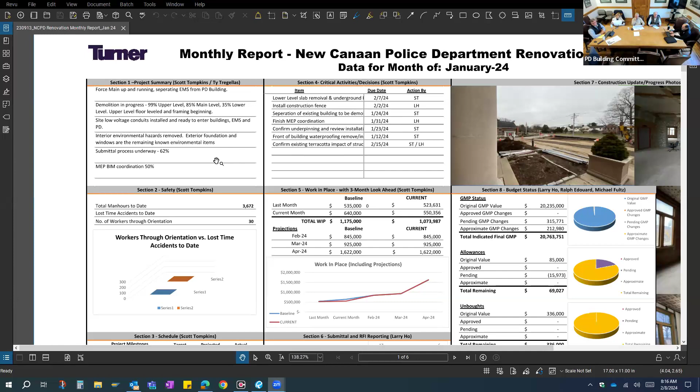Larry, you wanna pull up the monthly report? Did you send it out, Joe? People weren't really able to read it probably from there. Yeah, it was saying Gene sent it out. Does anybody see the screen? Yes, I actually have it on my computer at home here.

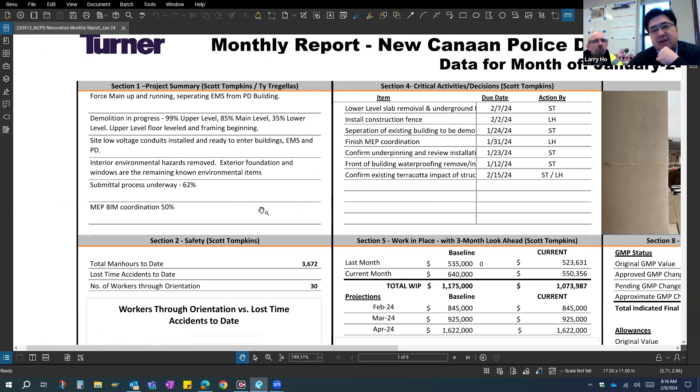So this is similar to last month in December, so we have a few updates. Basically the project summary. Do you want me to go through each section, or do you want to highlight each section? I don't know how the building committee wants to go through this, but I'll just give everybody some highlights.

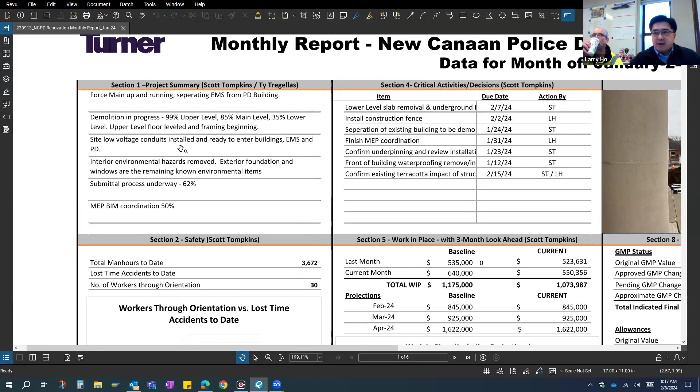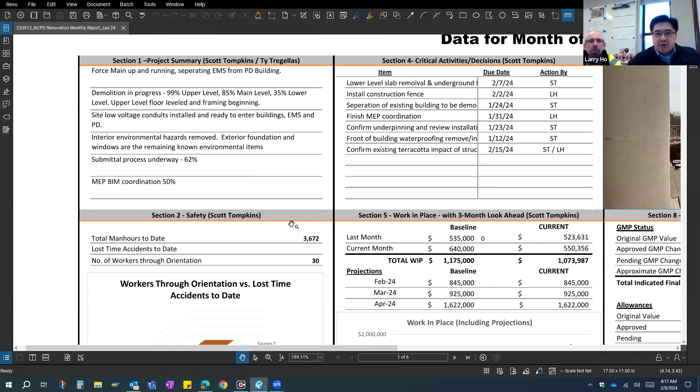Some project summary, current summary. The force main right now is completed, and we have the construction fence separating ourselves from EMS as well as the neighborhood area. Our current demolition: upper level is 99%, main level is 85%, and 35% at lower level. We're also starting to demo the existing floor slab that we are going to lower. Right now we're expecting to finish the rear building demolition, and then we can start clearing the dirt for lowering the slab.

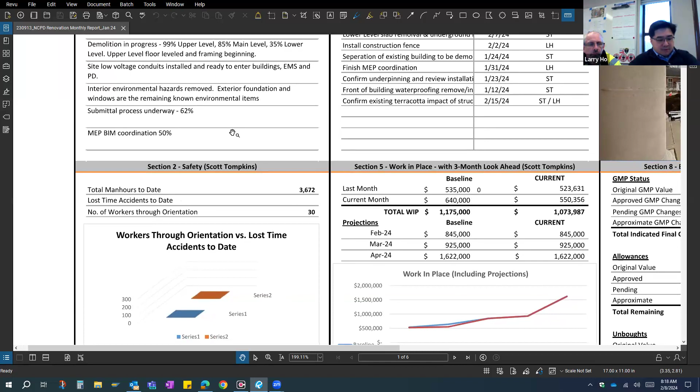Highlighting the submittal status, we're about two-thirds of the way through, not including closeout items. So we're in pretty good shape at this point. Most of the major main items are either in review, approved, or released. Our MEP coordination is at 50%. We've gotten through underground and upper level, so we're down to main level and lower level at this point.

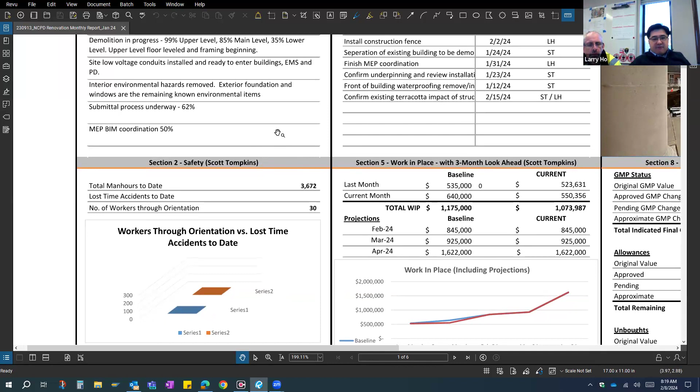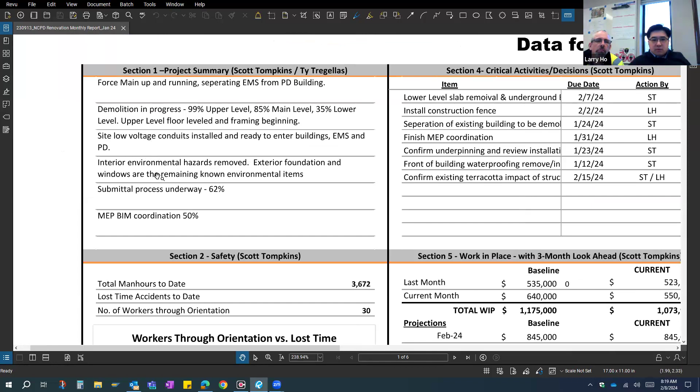I have a question on the third item, the low voltage conduits. Can you just explain what that is?

Those are the low voltage conduits that will feed the new fiber optic cables from the power pole at the street into both the PD and the EMS building. Currently they come into one side of the building, and we're working to get them to the other side. We performed underground conduit install at the EMS drive, and now we need to get them across the site and tie them into the EMS, so we can prepare to receive the new fiber optic cables to the new IDF closet on the main level, as well as refeed and support the EMS building.

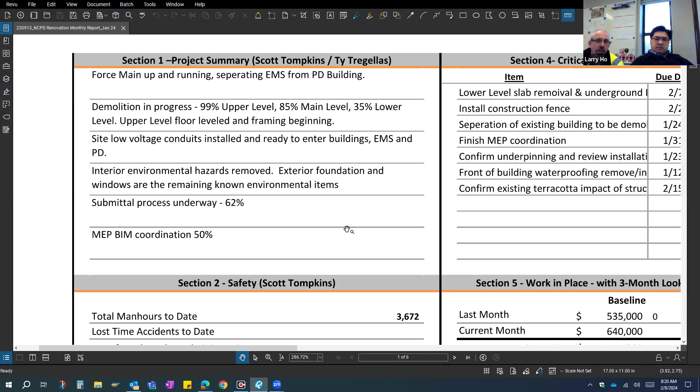Out of curiosity, how big are those conduits for the fiber optics? We've got four 4-inch conduits, three 3-inch conduits, and one 2.5-inch conduit. So they're substantial — 4 inches is a substantial size. All right, so we've got lots of room for future.

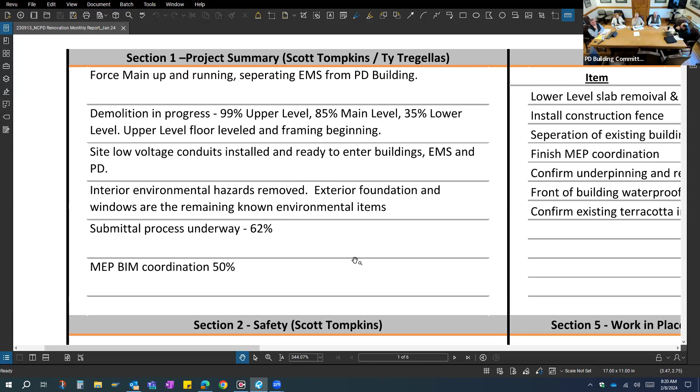The only thing we know for sure about the conduits is that when they go to plant a tree, they'll dig them up and cut them, sever them. That's the only thing we know for sure. Yeah, that's absolutely correct, but thanks for noticing. Hopefully not, knock on wood. All right, thank you. It's not direct buried cable, which is what we found too. That's what it was there. Yeah, correct. All right, good.

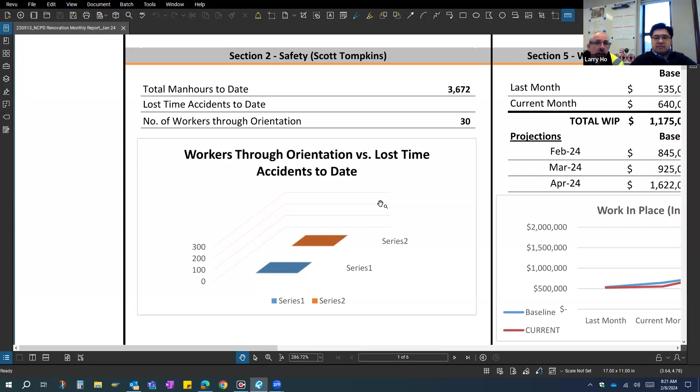All right, safety-wise, I'll go down the list. Larry and I will probably tag team this in different sections. Total man hours on site, we've got about 3,600 man hours so far. Number of workers we've put through orientation is 30, so we've had 30 men cycle through the project. We have zero lost time accidents, knock on wood. We've been doing pretty good out here with the safety team, so we're in pretty good shape there.

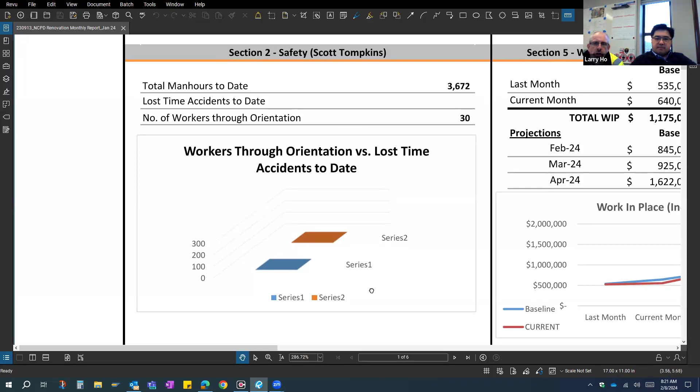Scrolling down to hit some of the major milestones. Obviously we're in the infancy of the project here, but certainly there are a couple we have hit. We've completed the EMS sanitary force main, which was a milestone to get EMS operating in their normal fashion as best we could, with their drive back up and running. We also started the upper level renovation, working through challenges with the rear building, the environmental brick concerns, and the jail cell. We were able to keep going upstairs, so we've started the upper level renovation.

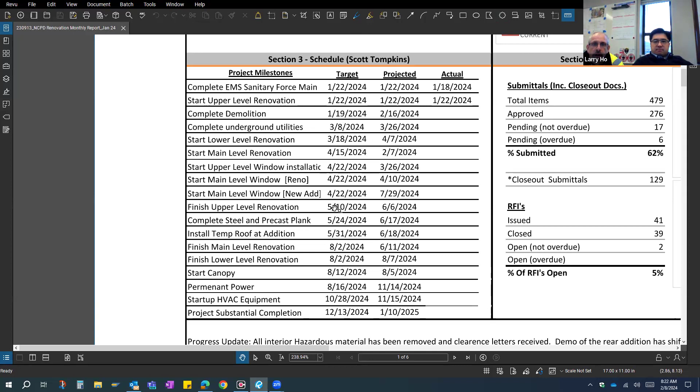As we go down, the rest will fall into place as we get to the rest of the milestones, but we're still in the infancy here. Certainly some of those milestones, our objective is to try to bring them up and advance them for completion. But we're going to keep moving on as the schedule dictates.

In summary, the third line, complete demolition, that's the demolition of the rear addition. The adjustment in that time frame is really a combination of the hold for the jail cell and the additional abatement, so it's just about a little under a month.

Why did the main level windows item jump by 3 months? Is that a typo? No — in our original schedule we didn't differentiate between the windows in the renovation and the addition, but the addition is obviously lagging behind. So we created an extra category, but in our original schedule we didn't differentiate; we instead just had a general windows start.

All right, look — everything's 3 weeks behind. So is there any effort, any plan, to get that 3 weeks back? We'll do whatever we can.

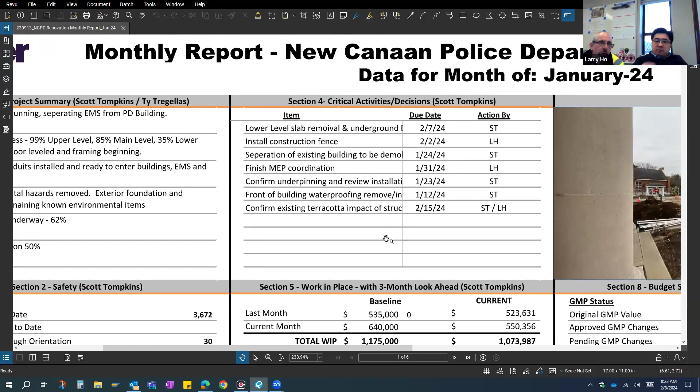When we get the locker room floors to the right levels, don't we have to do some demolition to lower it? Right — so what we're doing right now is we've chopped the floors out, removed the concrete slab. Once the building comes down at the rear, that allows us to extract or remove the dirt from inside the building. We can't do it now while we travel through the building demolition. So once the demolition is down, we double back inside the building, remove the earth to drop that slab 1 foot 10 inches, and then we can begin the interior work.

We've chopped the slab out to reveal all the dirt under the slab, the earth that the slab was poured on. We then investigated the location of the footings within the building, and we're in the process of doing that right now. We're working with our concrete vendor, who has secured a structural engineer to design an underpinning process where necessary, to underpin the footings appropriately to carry the load of the existing building. It's done in such a manner so as to never disrupt the structural integrity of the building while underpinning, which is basically supporting the footing that would otherwise be suspended if we were to drop the slab. So by dropping the slab, we expose the bottom of the footing. We then perform underpinning, which allows us to continue our efforts without disrupting the structural integrity of the building.

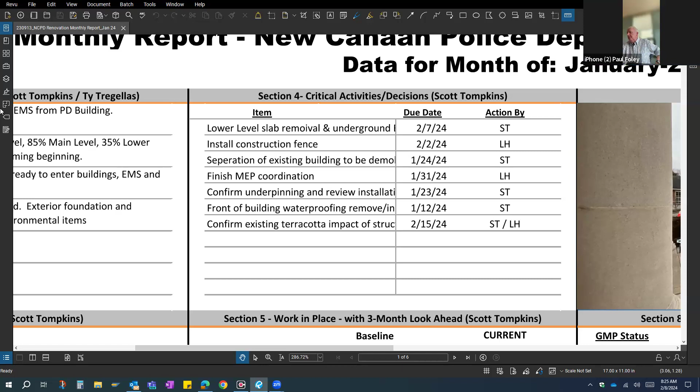The footings went down at least 12 inches and maybe more. Yeah, correct, the footings are down about 1 foot, 10, somewhere down about 2 foot in various locations. We need to drop the top of slab 1 foot 10, plus you've got some underlayment of stone for the bedding of the concrete, plus or minus 6 inches. So we're going down roughly 2 foot 4, 2 foot 5, and we're investigating that as we speak.

We had a site walkthrough with our vendors and our team, and we formulated a couple of questions for the design based on the existing conditions that we discovered.

If they're doing the right thing, I would vote in favor of reinforcing the footings with lateral support if necessary, just to protect it from your construction work. Oh yeah, we've got to follow the structural engineer. There's a separate engineer designing all this, and he's got all kinds of protocol, but right now each footing seems to be different - some are all brick, some have some concrete. So there are different flavors out there. The key right now is really to expose it, then bring the engineer down, reanalyze stuff, and get a fine point on the path forward.

Okay, caution's the byword. Ready to go? All right.

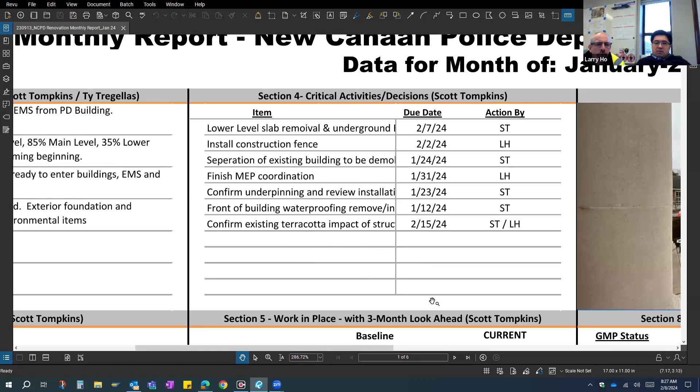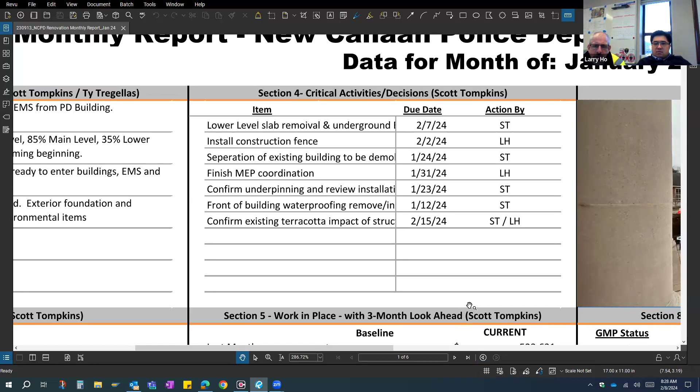Confirming the underpinning review is something we're working on right now. We have the designs from the engineer, we just need to make sure they are appropriately applied to the existing conditions and are true to what exists in the field. Front of building waterproofing, we're working on - I'm back and forth with both the waterproofing vendor and the site team as we're trying to manage the existing condition we have there for the existing waterproofing. If we can mitigate it without having to remove it, that would be the preferred method. Getting all the teams involved, just getting the manufacturer out here from Pennsylvania is our chase.

And then the existing terracotta structural impact concerns - I'm going to be walking with Brian Humes and the design team Monday. We're going to look at some of the challenges we've uncovered with the existing terracotta and confirm whether or not they are in fact challenges, or if it's a condition where we can mitigate and move forward without any concern. So that's happening. Those are the main critical activities we're working on right now. Certainly those will change as our direction progresses out here in the field.

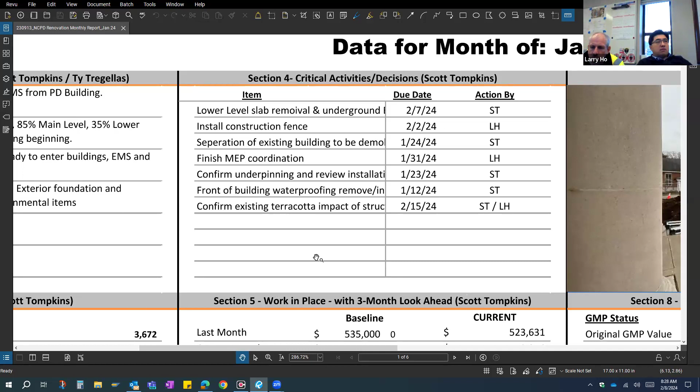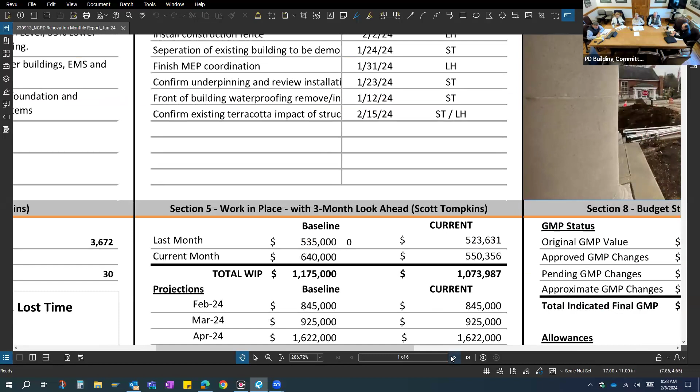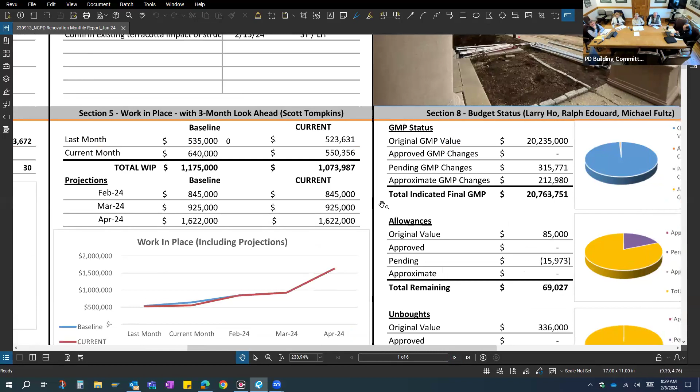So Larry, why don't you just run through some of the financial stuff with your backup sheets. Other than that, it's just... You want to do it now or when we get to the section? Yeah, I think we've touched on really everything else.

So with that, this is basically the backup with the financial stuff related to the front page. This is the backup of how those numbers came from.

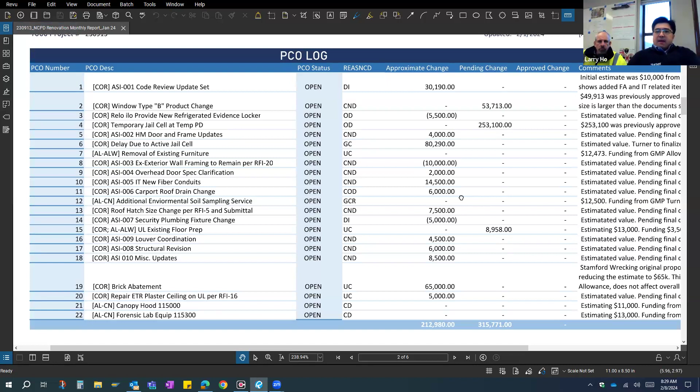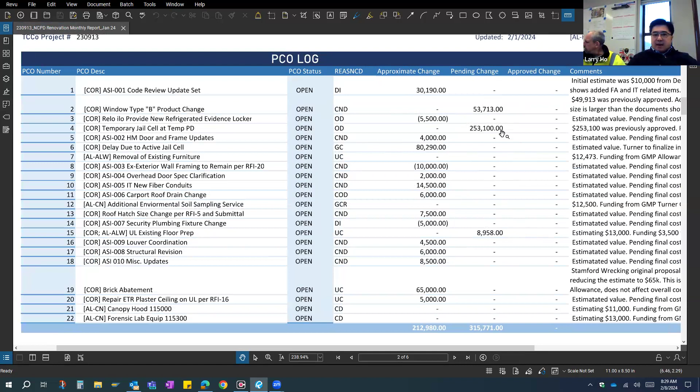So for the pending ones, I think we went through this the last couple of building committee meetings - the windows and the temporary jail cell, as well as the floor prep. So those are going through the motion, and this column are the ones that right now we currently anticipate there's some adds and deducts on certain areas, where we talk about the brick abatement. We are assuming right now it's estimated around $65,000. Right now we're getting the last pieces so that we can finalize the cost for those. I think those are the new ones from last month.

So I think, maybe not last meeting, but a couple meetings before, we talked about the existing plaster ceiling. Now that we have the carpenter here starting to look at it and fix it, this is a whole number with some cost impact.

I think other than those few... sorry, I got lost there for a second. Are we in section 6 or section 5 of this worksheet? Page 2, we went to page 2. That's backup, right. Okay, got it. Sorry, that's why I had that pop down there.

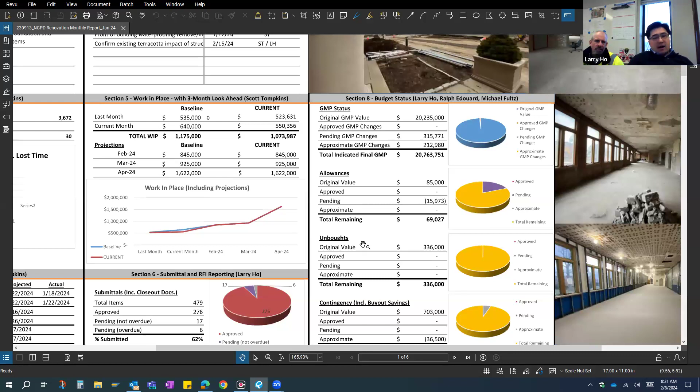That's kind of related to section 8. Oh okay, got it, Section 8 comes from that. Yeah, it's derived from the PCO log. Is that it? Correct, correct. Got it, thank you.

Just to remind myself, if I'm not remembering correctly, I thought from item 8 down was new since the last meeting, or item 9 down, that $2,000 one. Oh okay, alright, that's what I was remembering.

Just if you wanted to give a quick explanation. Sure, okay. Sorry, this log changes weekly, I forgot how many. So from 8 down...

Item number 9, there was an ASI from the design team revising the spec for the track. We're estimating some cost right now, and we're finalizing the overhead door with the vendor. And so, where's the overhead door in the project?

The overhead door, there are 6 overhead doors total. 4 in the carports and 2 in the garage area on the north side. In the new addition, southeast area, the sally port and carport area are next to each other. There are 2 from the exterior going into the building, and 2 sets of interior going underneath the canopy area, for a total of 4, plus the 2 in the garage.

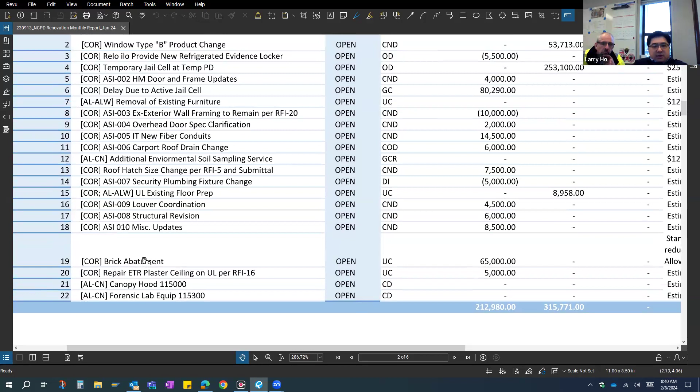Yep, thank you. And then the next couple of them, the brick abatement, we talked about earlier, and the existing conditions I mentioned earlier as well. And the last two, PCO number 21 and 22 - while doing the submittal process, I found out there was a scope gap, and we're buying the product. I think we were purchasing assuming that they may be reusing existing equipment, but it was not the case. I guess we misread some of the specs, so that's going to come from a contingency for those.

Where's the canopy hood go? I'm sorry, it's the gun cleaning room. This is the canopy hood for the gun cleaning. Oh, okay, got it. All right.

And that was misread? No, when we bought out the job, we bought out the connections between the hood from the mechanical guy and the electrical subcontractor. So somehow we forgot to buy the equipment itself. We thought we were using existing equipment, and when we started digging deep, there was a scope gap between ourselves and the drawings. So what he's saying is it's on the drawings, they just have to go out and buy it now. Correct.

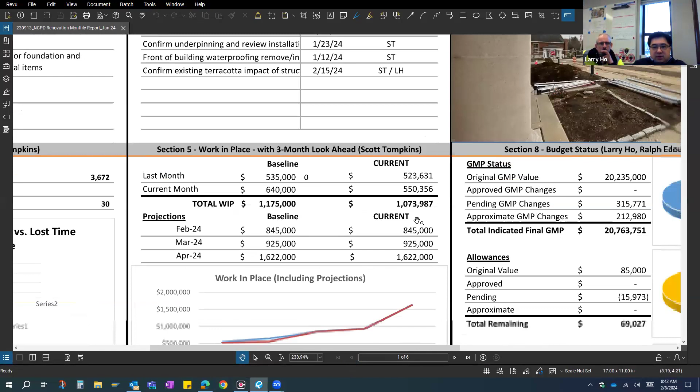All right, go back to that. All right, right, we'll go back. That's what all this number represents. All right, okay.

I think that's it. Some pictures. Current cash flow seems close to our original projection. So yeah, we've submitted our next bill, which is about $550,000, a little under our projection, but I think that speaks to some of the delays in the demolition process.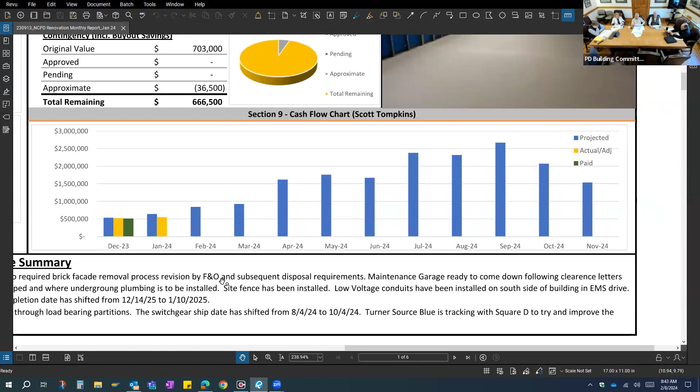I'm sorry, I know you explained this in other meetings, but can you talk about what the unboughts report is? It totals $336,000. It's similar to - basically the same terms, it's on board - exactly the same as holds. It's something that we know, dealing on the GMP, there are certain things we know we're going to do - let's say MEP coordination - where we know there may be some cost to it, but we couldn't put an exact dollar value. So we have a hold that we can put within the GMP.

So the $336,000 is already in the project cost? Yeah, exactly, it's unbought on the front page. Okay, thanks. Yep.

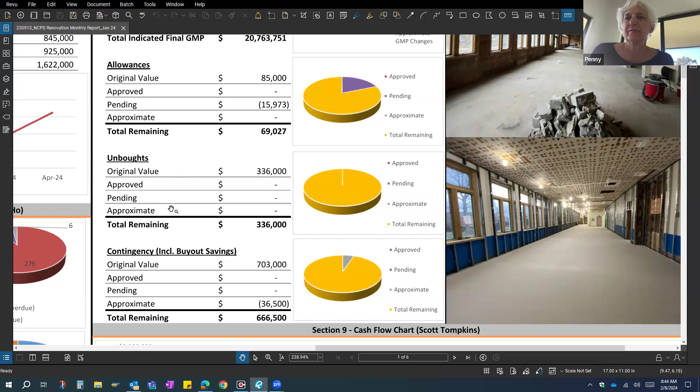That's about it with the overview of the January monthly report. And any questions?

Just a quick question on the steel and the precast. Those are two big milestone activities. Are you comfortable that shop drawings approved and fabrication are going to hit those dates?

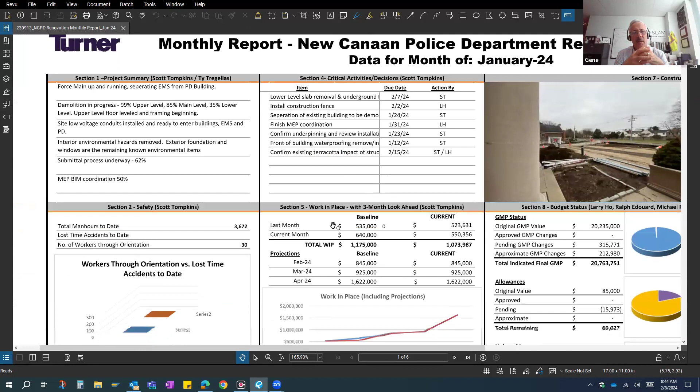Right now we are finalizing the steel shop drawings. There's some conflict with some of the last bit of finishes when we start getting all the products, so I'm working through with the design team to try to get the release. I think our current schedule shows May, whereas the original was mid-April. From the last conversation we had, I think beginning of May is what they're looking at as well.

So right now, with the last bit of coordination, we should be able to release the steel. It's just getting through these disruptive products and challenges for the MEP coordination, and getting to a point where we've solidified all the outstanding issues. We're trying to keep the ball rolling on the upper floors and underground with the MEP while chasing these conflicts, but I think we're close. Our MEP meeting is today, and hopefully we can button those up and keep things on track. That's something we're tracking and is important to the timeline.

I just wonder, because you have completion dates versus start dates, it's a little hard to understand when they're supposed to be on site unless you go to the schedule.

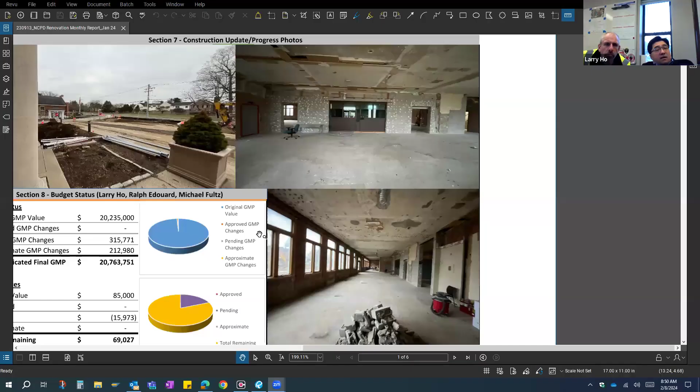So on the top left, the photo is of the front drive. For those who don't have it in front of them, that top left picture is really just the front drive. We put in the underground and we're preparing for the force main.

The one to the right is a front door elevation looking in at the old dispatch area transaction window.

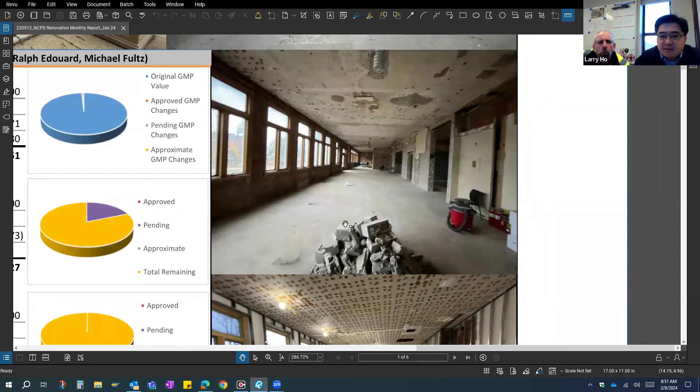This lower one on the bottom is also on the lower level, looking through from the chief's old office across the front of the dispatch area. That pile of rubble was looking back into the old conference room.

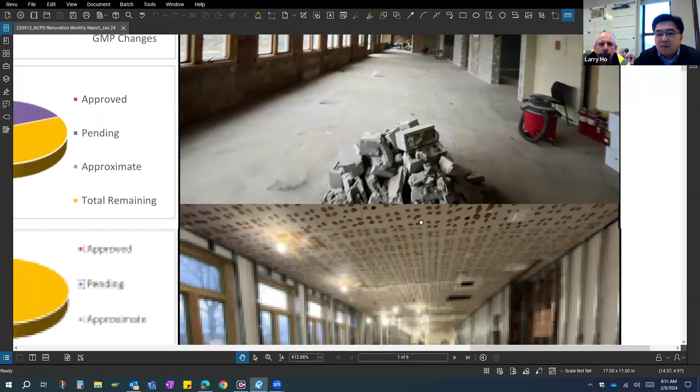This upper level shows that we've leveled the floors with floor leveling. We've taken down all the demolition on the upper level. You're looking at the elevator right there. The studs are up around the perimeter, the floor is leveled, and we're beginning the process of framing right now.

So if I may take a quick hit so everybody knows what's going on. Upper floor, we've floor leveled and shot top and bottom track on half of the area. The entire area is laid out, so we're continuing with the track. By the end of this week, we should be 75% done with our framing up there.

The electricians have started pulling their wires in the walls and putting in their back boxes. The HVAC team is out doing their layout to coordinate overhead hangers and parts in coordination with the framing, so we can box out appropriately. We're looking at the soffits for the exterior windows and starting that framing. So there's a lot going on the upper level.

On the main level, currently we have the last bit of demo happening in the dispatch area and cleanup. We've got some floor patching where the holes for the old bathrooms are. Next week we're going to get out there and scarify the floor, shot blast it to prepare for the next round of flooring on the main level.

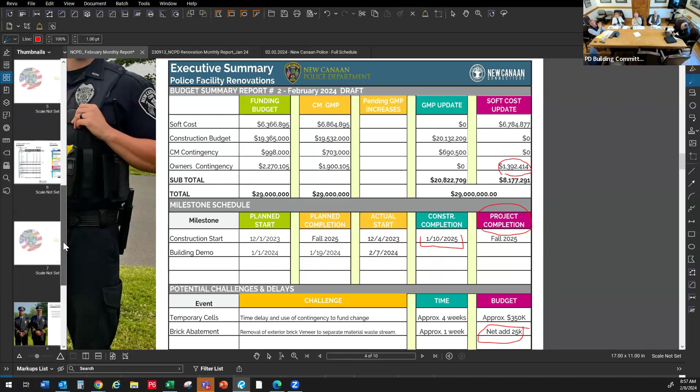Move in would then be fall 2025 or a little bit before? Correct, yes, or before. It's just a little early. Summer of 2025. So what we did was we put the fall of 2025 because that was our projected completion date. We'll bring that forward as the data suggests that we're going to be done earlier.

I think we're going to be able to bring that back to June pretty quickly, but we wanted it to start where we started. We need to do that for two reasons, because the good bid that Turner came in with was based on a reduction of the general conditions by having a shorter schedule. So if we blow the schedule out, the general conditions will blow right back up again. You're assuming in that logic that Turner's there for the last 3 months, where it might just be a skeleton crew for us moving furniture and other things. But I understand your point. We will move forward, it was just that we wanted to start with the baseline.

That January 10th first quarter 25 date is still critical to keep the project cost down. I think the suggestion, also Penny's suggestion, was not to show the project creeping, because we don't want the public to see that the project is slipping when really we have a fall completion of 2025. We'll tighten that up as the project gets closer, to come up with the win.

Otherwise, I think, just in some of my commentary, that rear building removal, although they did remove the pre-engineered building piece of that earlier, the completion of the demolition really started right around 2/7 for the actual demolishing of the building. And as Turner mentioned, the EMS force main, which was a big piece of separating the umbilical cord between those two buildings, is done. Overall project completion for demolition is about 75%, although there are certain sections that are done in advance if you look at the Turner section 1 on the report. So I don't want to repeat stuff that he's already done.

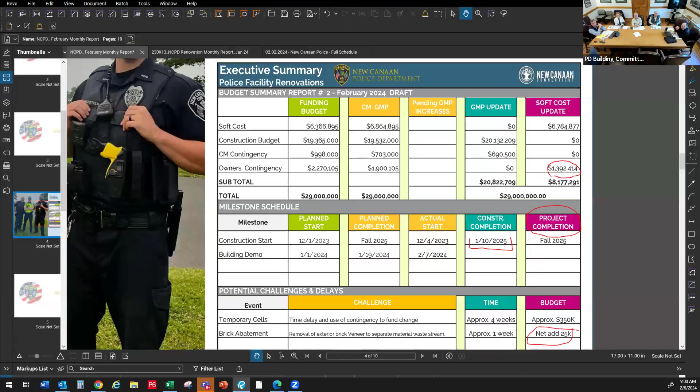Questions? Any more updates before we go on to the next steps? Actually, Brian, if you could go through the terracotta question regarding the windows or the borrowed lights.

Thanks, Joe. I'm going to be down on the job site Monday, the next time I'm going to be down there visiting. As reported in January, when we stripped off some of the drywall, we found that the masonry that we thought was CMU was actually terracotta. That terracotta block is not a real stable product if you want to start cutting it and putting lintels into it. The structural engineer is not comfortable with that being cut and modified.

So the area that is in question is the physical training room and the walls that we want to put these windows into. We have a door opening, three window openings, and then another door opening. That wall that we want to cut and put those openings into is actually looking like this - that's the terracotta block that we're finding. Now, to the right of it is CMU, which is what we were anticipating seeing. But even in this area, in 1980, they did some demolition.

I think this was so they could install a fire extinguisher cabinet. This is all structural wall, but they compromised the masonry here back in 1980. So if we're going to put openings in this wall, it's the recommendation of the structural engineer that all of this terracotta come down and be replaced with CMU, which is the product you see on the right.

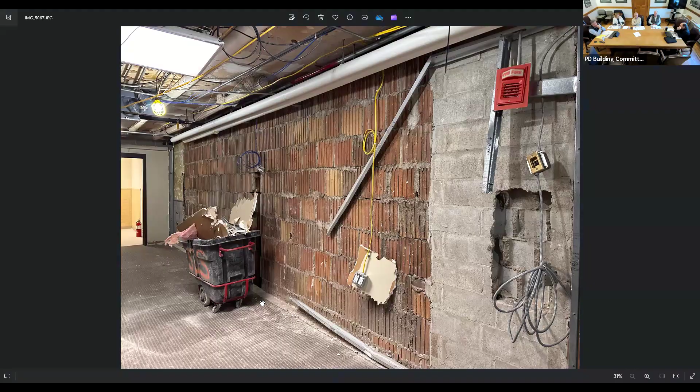There might be a third alternative. I don't know if it's any cheaper, but we could just cut out the window areas and put in vertical steel reinforcing beams. That's another way to support the floor above.

I think the masonry may be more cost effective, to get the mason included, and it's just along this wall instead of footings and columns, because we're not cutting the slabs in these areas.

Give me approximately the delta to convert over to CMU, how much? We've done that calculation. Actually, probably the biggest expense is you have to shore up the building when you take all that terracotta out, so we've had to put shoring towers in and steel beams across to pick up that load.

That should be able to not be so expensive, especially if you do it incrementally instead of ripping it all out. If you do it by section, there are ways to do that without being quite so expensive. So let's get a number on that, but I would favor going to the CMU replacement. If doing it incrementally is more expensive, let's figure out the least cost way and get a number.

We would defer to Brian, the structural engineer, on that. I know the windows were a request of the building committee, so we put them in at that request - I didn't want to make the determination that they go away. We can put them in, it's just a choice, Brian. Instead, since we thought this was going to be CMU, we put 3 small windows in.

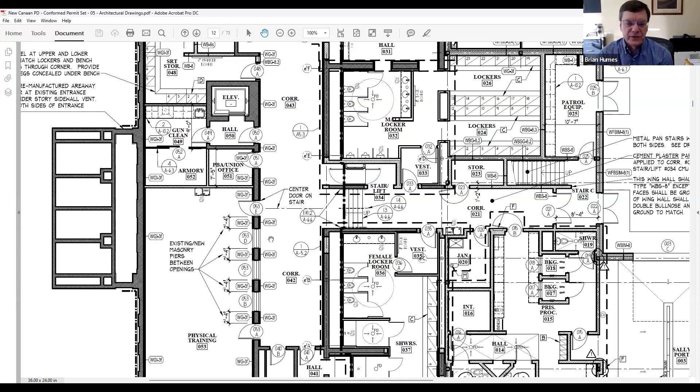We could have glass doors now too, right? With the glass doors, that would help. The doors do have glass, so there is glass in the doors - it's whether you want additional glass. Could we even add more? To what extent are the doors glass? Half glass - we have pretty good vision into the hallway from a safety perspective.

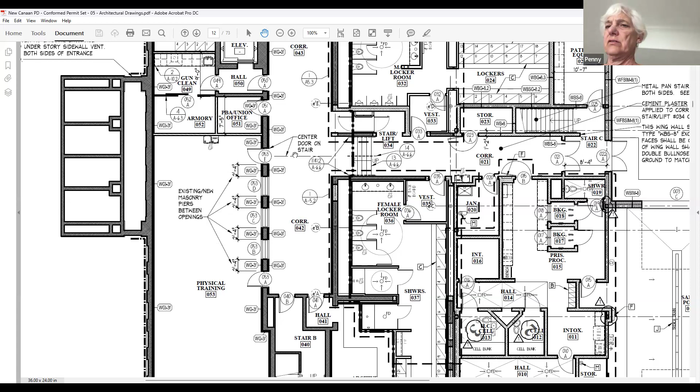Okay, why don't we get Brian to get a price for a couple different scenarios so we can make an intelligent decision on how to move forward. Let's get the CMU replacement costs, and then with the 2 glass doors and 1 window in the middle - that's probably the second least expensive alternative. I'll be down there Monday, and this is what I'll be looking at.

And when was the terracotta put in? 1927.

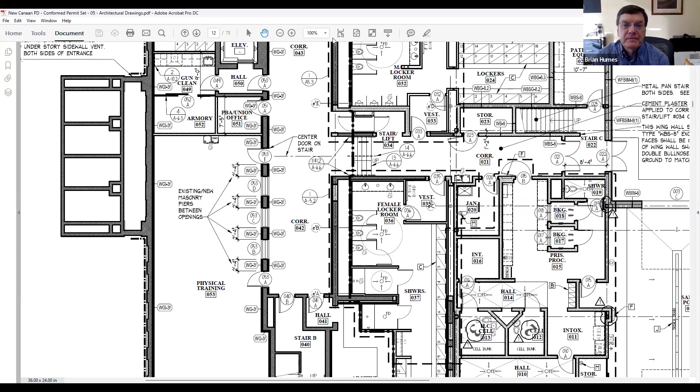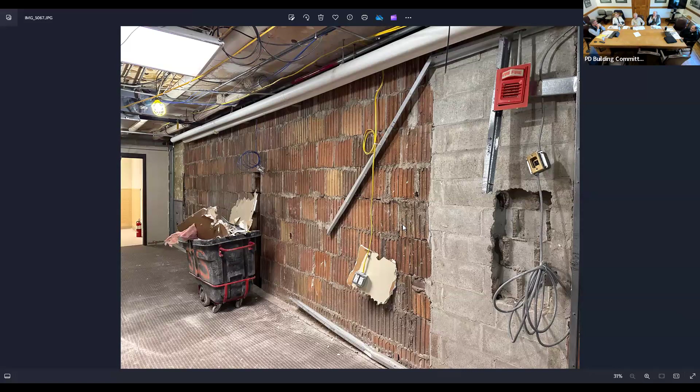And we've already ordered the 3 windows, right? Correct. Well, I don't know that we've actually placed the orders, but we're doing shop drawings. I don't think we're into fabrication yet. We included the cost of the 3 windows, yes. The cost of those frames is in the GMP.

But you may be able to save that. So it would be the delta - you're either gonna save money by deleting 3 windows, or you're gonna add the shoring, the CMU, and then have to do a credit for the base work. I don't want to throw out numbers, but if it's gonna be a $25,000 item...

Is the building committee interested? Speaking for myself, probably yes. But I think the one you didn't include is one window in the middle and two glass doors, so you get three windows in. I think I heard Brian say, once you touch the terracotta wall, if you took that out, the structural engineer is not gonna want us to keep any of it. Is that correct? Right, let's see.

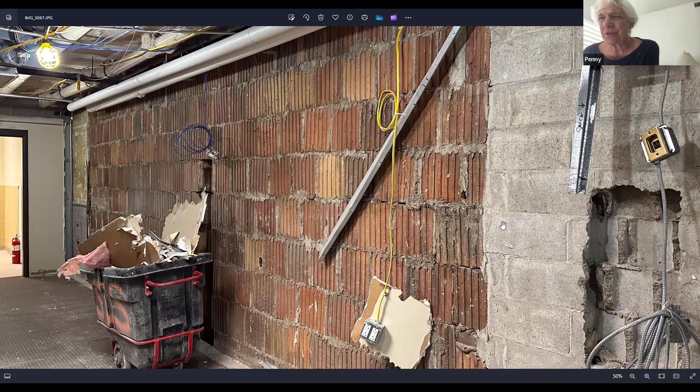Joe, I agree - were you saying you thought the whole change order would be 25,000? Oh, no. I'm trying to establish the value of those windows as far as a go, no-go, before having Brian and everyone chase pricing around. It's going to be in that order of magnitude.

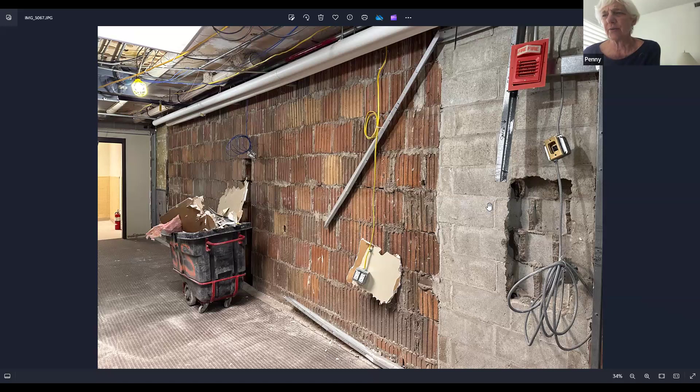I'd vote for that. I think we wanted to do that, we were concerned about that space. We went with the slightly lower roof because we think it'll work, and the windows were important to open the area up and also for visibility. So if that's the level of change order we're in, I'd be prepared to go forward with it. If it's for $150,000, you'd probably say no.

Let's get the numbers and then discuss it next meeting. Or if you need an interim vote, we'll do that. Just keep us updated.

Larry, if we're talking to the subs about the shoring, because there has to be some engineered shoring done - the engineers will have to give us their opinion on everything. Just give us an update if you see it going much more expensive or much cheaper, so I can update the committee. I think the thought would be if Brian just gets together - I don't care if it's verbal, a written note, or a description - so at least we can follow it with a basis.

What are we pricing up exactly? We could certainly chase something there and try to break down some shoring, some CMU, and then window frame stuff. So when you come out Monday, Brian, we can just talk so we're clear with our request so we can expedite the information we receive and make sure it's useful.

We first saw this in January. We reported to the building committee in January that it was terracotta. There may be some structural implications, but this lower level wall seems to be the biggest impact. Everything else I think is manageable. Agreed.